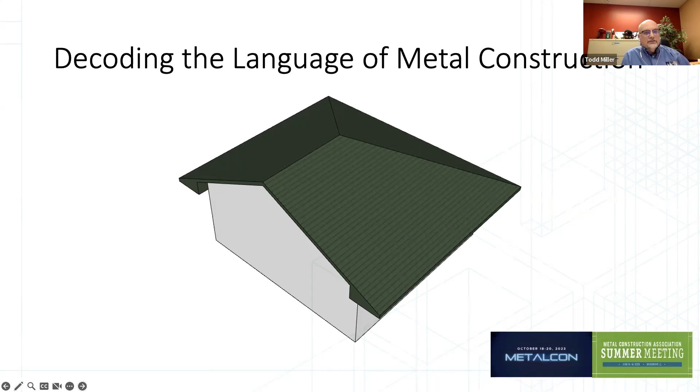So let's start off by looking at a general roof. We're going to look at some of the terms on a roof, and even though we're talking in terms of metal roofing, a lot of them also apply to metal wall panels, or at least very similar terms. So as we go around the roof, we can start with some basic roofing terminology.

Here you see some of the basic parts of a roof being pointed out. Some on top of the roof, such as the hip, your rake trim, your eave trim, your ridge trim. But then you also have areas underneath, the soffit and the overhangs. Also your open gables, which will have overhangs and soffits as well.

We got something pointed out there called a cornice, and I hear those called about 10,000 different things, and wraparounds and Victorian this and that. So there's all kinds of terms used for some of those decorative type areas that might be on a roof.

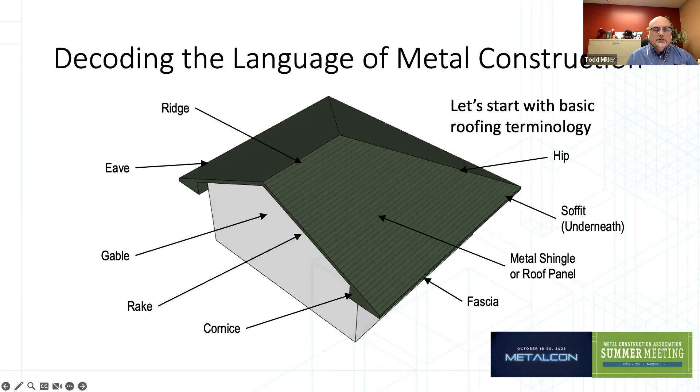But then, of course, in the field panel, at least in the metal industry, we either have some sort of metal vertical panel or a metal shingle panel that would be used in the field areas of the roof.

Looking a little further at the roof, on a hip and valley roof, we're pointing out here where the hips, valleys, and ridges are.

One thing I wanted to point out is that sometimes folks will look at a roof in a northern climate, or see a photo, and ask what are those little pointy things at the bottom of the roof that are sticking up. Well, those are snow guards, and there also can be snow rails and different ways of doing that. But basically, those are all systems of snow management.

One thing metal roofs are fairly well known for is shedding snow loads. A lot of times what happens is you get a snow load on the roof, the sun comes out, a little bit of radiant heat passes through the snow load, hits the metal, warms it up, and as it starts to reflect back out, the snow load releases and tends to slide all at once.

A little bit like some of us up north may have seen happen when our engine heats up the hood on our car, and all of a sudden that snow lets loose. But that's only if you're bad like me and drive around with tons of snow on your car, which isn't the smartest idea. But anyway.

So we use these snow guards, and they typically will be staggered over areas of the perimeter of the roof that you want to protect. You're going to want to protect doorways to keep from blocking them. You may also want to protect delicate shrubbery or statuary that may be in the firing range of that snow sliding off the roof. So that's what snow guards are.

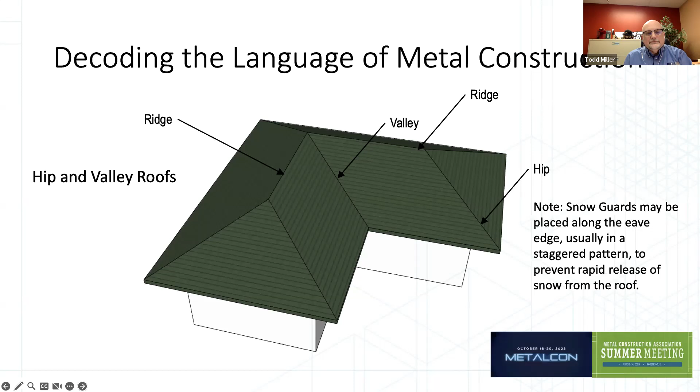So let's dig a little deeper here. We're going to look at the different types of metal roof panels. Again, some of these very similar terms would apply to wall panels as well.

So we're going to start by talking about snap lock standing seam. These are panels typically from 12 to 18 inches wide, with a raised rib or raised seam, a standing seam, in between the panels.

When they're installed, the female lock on one side of the panel snaps over the male lock of the adjoining panel. The panels may be secured either with hidden clips that attach to that male lock and are fastened to the roof deck, or some versions of snap lock standing seams have a hidden fastening flange as well, with slotted holes that screws go through. We oftentimes call those nail hems, but we don't really use nails through them, we use screws. Typical minimum pitch for a snap lock standing seam is 2:12.

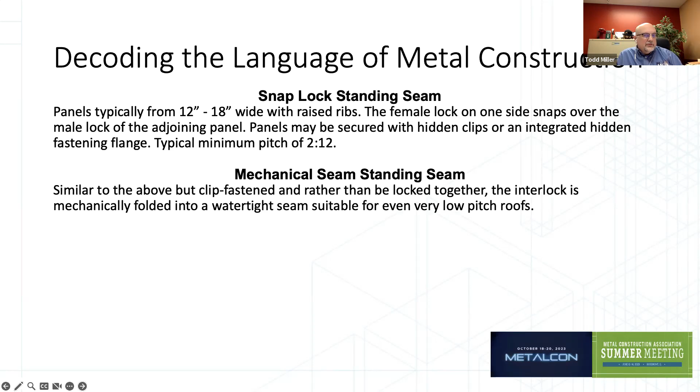Then we have mechanical seam standing seam, very similar to the snap lock, except the panels are put on the roof and rather than being snapped together, you run a seaming machine, or old school guys do it with tongs, to mechanically fold that interlock into a watertight seam. One benefit of that type of seam is it can be watertight down to a very low pitch, even as low as 1/4:12. These panels tend to vary a bit in width, typically on the wider end, maybe in the 16 to 20 inch range. All the fasteners are concealed. A mechanical seam standing seam has clip fasteners rather than the fastening flange I spoke of earlier with the snap lock variant.

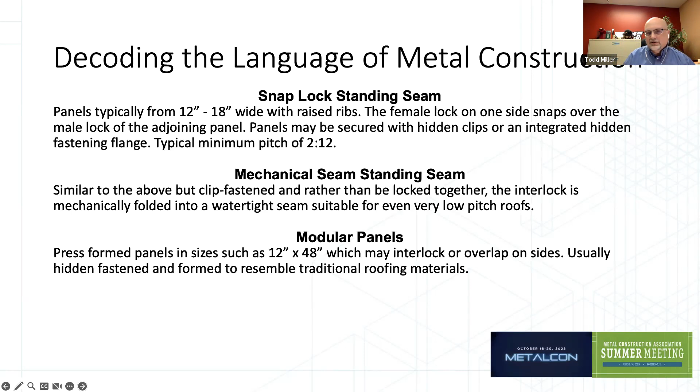We also have modular panels available in the metal roof industry, and these are press formed panels. There are a lot of different producers, and they all have different designs and dimensions. A common dimension would be something in the 12-inch by 48-inch range—12 inches top to bottom, 48 side to side. The panels either interlock or overlap on their sides. Some interlock on all sides, some overlap on all sides, and some overlap on two sides and interlock on the other two. So there are a lot of variants out there. Usually with modular panels, they have hidden fasteners, not always, but usually. A lot of times these panels are press formed to look like more traditional roofing materials—stamped to look like slate, wood shakes, shingles, or even barrel tile.

Finally, another type of metal roof panel—and I don't have these in any particular order—is what we call exposed fastener panels, or through-fasten panels. These are basically sheets of corrugated metal in various profiles: R panel, PBR panel, 5V crimp, other ag panels, and other profiles as well. They're secured to the roof with screws driven right through the panels. Those screws have a rubber grommet or washer to keep water from infiltrating around the screw hole. So those are the four basic types of metal roof panels, and you get similar variants available on the wall side as well.

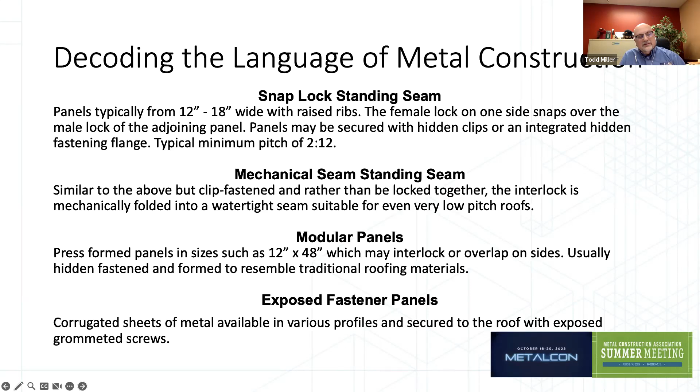A bigger term you'll hear on occasion is structural versus architectural panels. Structural panels are panels that do not require solid decking underneath of them, so they can literally span over the trusses and other structural members of the building—they can free span without solid decking underneath. Architectural panels, also sometimes called non-structural panels, on the other hand, do require some sort of solid decking underneath of them.

Just for clarification, most of the modular panels being made are architectural panels, meaning they require solid decking. Solid decking can typically be wood, such as CDX plywood or OSB, or it can also be a metal deck. Another option on older structures is a roof deck of dimensional lumber that's closely fitted—the gaps between the boards might be 1/4 inch or so, but there are no significant gaps between the boards. And then you've got battens.

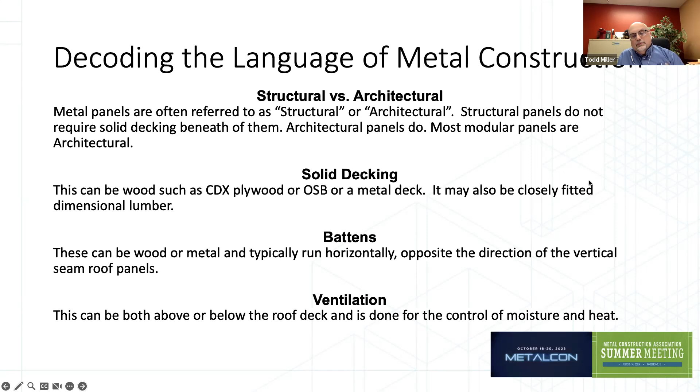Battens would be used more in the structural application I spoke of earlier. Battens can either be wood or metal—certainly on metal construction buildings, they would be metal. Those battens typically run horizontally, and then the vertical seam roof panels are installed spanning on top of them vertically up the roof, but the battens themselves run horizontal.

Another variant is to cross batten, where you run vertical battens and then horizontal battens. The purpose is to give you nice air chambers up the roof for ventilation beneath the metal panels. When you put those vertical battens down first, it creates vertically oriented air cavities so you can bring fresh air in at the bottom, exhaust it out at the top, and get good ventilation.

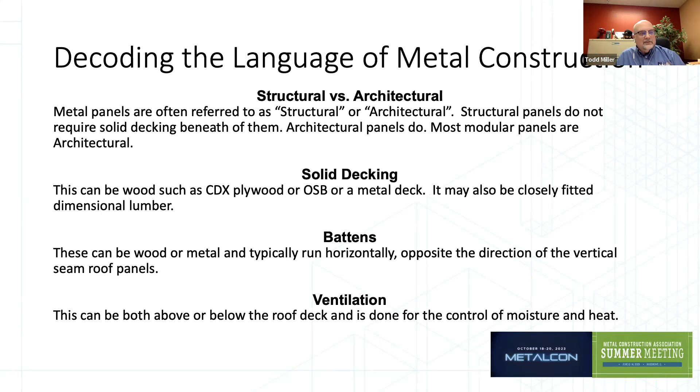So ventilation can be done above the deck, which we call above sheathing ventilation, or ASV, or it can be more typical of what we see, which is ventilation in the actual attic space beneath the roof deck.

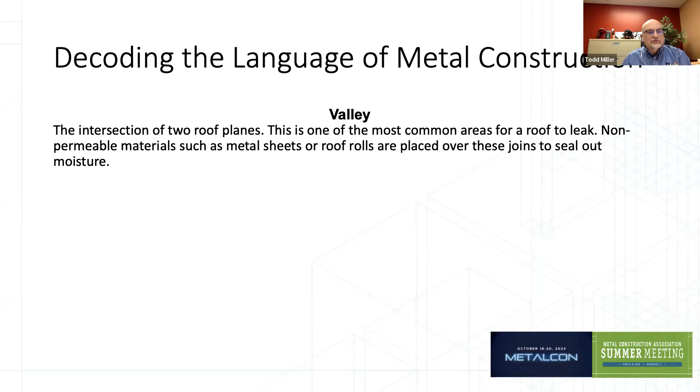A few other terms: valleys on a roof. The valley is the intersection of two roof planes, which we saw on that L-shaped building roof drawing earlier. Valleys can be a common area for roof leaks to occur, so typically on a metal roof, they line that valley with some sort of matching metal that matches the rest of the roof. There are also a couple of variants of valleys: open valleys and closed valleys.

Open valleys typically will have a valley pan put down and then a cleat on both sides of the center of the valley, and the panels come into that cleat and lock over it. We call this open because everything's out in the open, nothing is concealed. On the other hand, a closed valley is more like two J channels back to back in the valley that the panels are received into, or something like that. Closed valleys create a bit of closure to help protect against weather.

But the problem is closed valleys can also be prone to clogging with debris on the roof, because everything that ends up on a roof, if there's a valley, is going to end up in that valley at some time, just because gravity carries it there. So if you've got a valley system with closed channels, like J channel type areas, those areas might collect debris, which could be tree leaves, pine needles, ice, or snow.

And then finally, we also have Death Valley. Oh wait, that's a really hot, dry place in Central California. That has nothing to do with roofing, although we do have dead valleys.

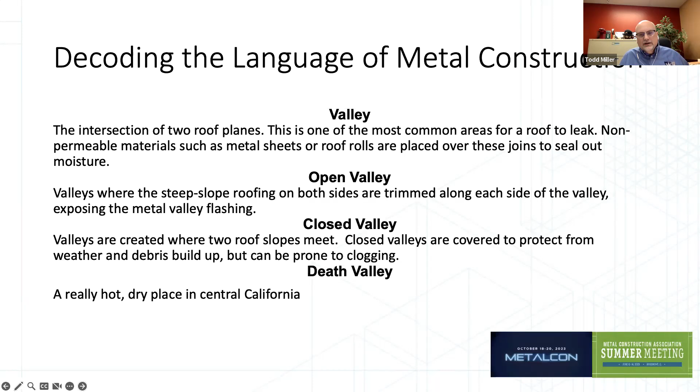Dead valleys are eave to eave situations, which can be nasty critters to work with. But again, typically you're going to line a dead valley with metal to match the rest of the roof. Ideally, you'd probably put some sort of a saddle or cricket in the middle of that dead valley to help push the water one way or the other, or perhaps both ways. And there's our Death Valley sign.

So let's look at some other terms. Flashing. Flashings are really kind of a generic term used to refer to the pieces of metal used to keep water from going into a joint. So let's say you've got a roof that abuts against a wall, or runs into a chimney, or runs into a skylight. Those are areas where you're going to flash.

One of the interesting things about metal roofing: a lot of times when you look at traditional shingle roofs, you'll see flashing on walls called step flashing. These are small 8x8 pieces of flashing that are stepped down that protrusion, whatever it is. Typically in metal roofing, we actually use lineal pieces, so those would be flashed with a continuous lineal piece rather than those small step flashings.

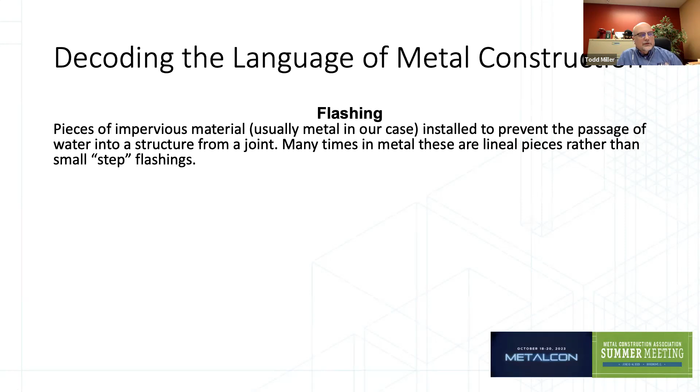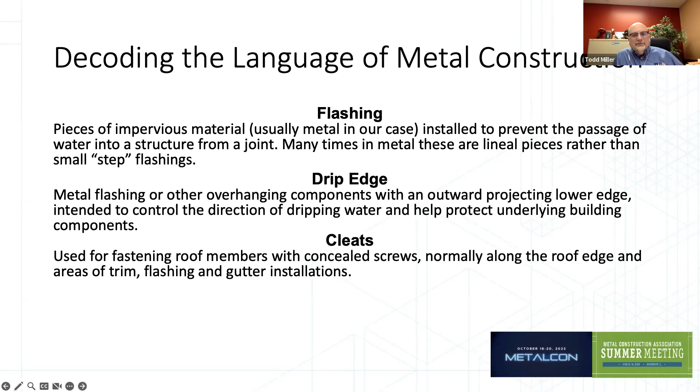Drip edge is going to be at the bottom edge of the roof, and that's basically to direct the water, as it exits the roof, someplace hopefully away from the building. If there are gutters on the roof or some other kind of water control, the drip edge is going to direct that water into the gutters. Cleats, we'll look at a picture of those in a second, but cleats are basically a method of being able to put trims on a roof without having any exposed fasteners.

Finally, I want to talk about underlayment. Underlayment typically would be used on a roof that's being installed over solid decking, and the underlayment is a water resistant or waterproof barrier installed directly over the deck. It goes underneath the roofing materials and provides an added layer of protection in the event of severe weather. But sometimes metal roof installs take a little bit of time, so you want to make sure that roof's protected by a good underlayment.

During the process of installing the metal panels as well, a lot of the trend in metal roofing in recent years has been toward what we call synthetic or polymer-based underlayments. These are still mechanically fastened, so you nail through them, typically using plastic cap or roofing nails. But they are not the old asphaltic felt underlayments, so they ain't your grandfather's underlayment, I guess you'd say.

But then we also often, as required by code, use ice and water shield around the perimeter of the roof, maybe up the valleys, maybe even up the gables. One of the very important things with ice and water shield beneath metal roofs is to use a smooth surface or a rubberized surface ice and water shield, not a granulated or sanded surface underlayment.

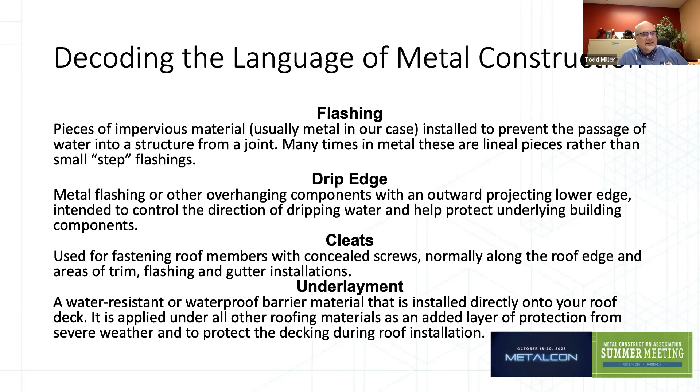The problem with the granulated and sanded surfaces is, as the metal panels sit there and expand and contract with some thermal movement against that abrasive surface, it's going to scratch the backside of the metal roof, which could cause problems down the road. So you want to make sure your underlayments always have a smooth surface. Another reason is you want to make sure your metal panels don't end up sticking to the underlayment, because with expansion and contraction it could tear it or cause it to bunch up.

So here's that cleat deal I was talking about. Nice drawing here Bob made with an eave detail where they've got a cleat. So you see that lower piece there that the screw goes through, where it's being driven into the fascia - that is the cleat. And then the drip edge is snapping over the cleat on the bottom edge.

The drip edge is going to be screwed into the roof deck in a concealed area. But what this does is it allows you to have a nice drip edge with absolutely no exposed fasteners. On the other hand, that drip edge is held firmly in place, which helps a great deal with wind uplift, making sure the drip edge doesn't blow up on you and cause problems of wind infiltration as well.

Hey, thank you, Todd. If you just back up one slide, I did want to point out one thing.

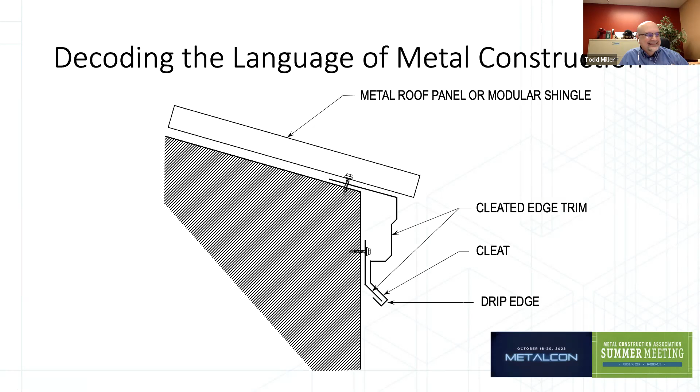Cleats are important, as Todd said, not just to conceal fasteners, but they also provide a means to address linear expansion and contraction without creating that binding situation at the fastener. I also wanted to mention, and this is my fault, I'll own it and fix that, but I've got arrows swapped. So the cleat label is actually pointing to the cleated edge trim, and the second leader for the cleat edge trim is actually pointed to the cleat. I'll fix that little hiccup in the slides here. So thank you for that.

And yeah, I was going to get into the underlying materials and talk a little bit about paints and finishes. This stuff has been - it's old terminology in this industry. We've used it forever, but it's funny that as we've gone along, some of these definitions may not be exactly what you think.

And Gauge is a good example of this. I've very carefully worded this definition: a numeric identifier for steel less than 3/16 of an inch thick, and that's actually called out in a couple of different standards. At 3/16 inch or above, you use the thickness expressed in fractional inches, but below 3/16 inch thick, you use this gauge identifier. A smaller gauge number means a thicker steel, and I've got some examples on the next slide. Also, a gauge represents the thickness of the uncoated steel - the metallic and paint coatings add to this.

Now, what is not called out here is that there is actually not a consensus-based written standard that says 26 gauge is equal to X millimeters or fractional mils or fractional inches. That does not exist. A big reason why is that although 26 gauge from different manufacturers are very, very close in decimal thickness generally speaking, they won't match exactly. Really the reason why is that when this terminology was evolving, there were really two main steel manufacturers in the United States, US Steel and Bethlehem.

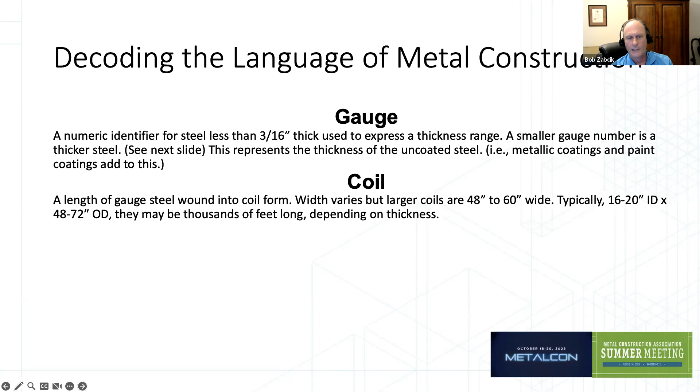But coil, well, that seems pretty obvious what a coil is, right? There's some interesting tweaks to this too. A length of gauge steel wound into coil form. The width varies, but coils are usually 48 to 60 inches wide. Larger coils can be slit down to smaller coils to manufacture different types of products from there. But we're talking about the base coils.

Usually an interior diameter of 16 to 20 inches, an outer diameter of 48 to 72. If you do the math on that, we're talking about materials that are 0.025 to 0.03 inches thick. That's a whole lot of material. They can be thousands of feet long rolled up.

And then there's flat stock. Also sounds obvious, but maybe there are some interesting things you aren't aware of. Most flat metal panels come from flat stock, but flat stock comes from coil. And when you wind coil, those dimensions you see up there, the interior diameter and outer diameter, are carefully chosen on the basis of the thickness of material, so that the interior winds of that coil don't actually reach the elastic limit, and there shouldn't be any memory.

In other words, the coil trying to take back its round form. But of course, if it sits in a banded coil position long enough, it will have some memory to it. So you actually have to decoil or flatten material for flat stock. We do that in an inline process in this industry quite often.

But that's really the difference between gauge, or how these three interrelate: gauge material, coil, and flat stock. We'll ship flat stock to make special pieces in the field, or we will make unique boxes, trim boxes, cornices, like we saw earlier, out of those materials instead of from coil. Coil generally is used to produce panels or some type of blank for another piece of material being made from it. So some of that terminology does cross over. That's why I wanted to bring that out.

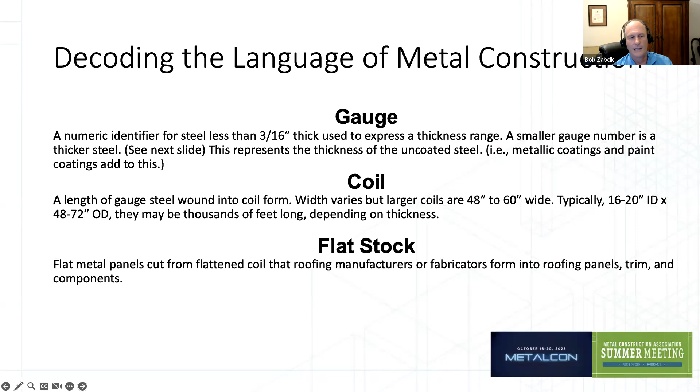So, next slide. Here's an example of what these material thicknesses by gauge look like. This is not, again, a consensus-based standard. This is just, if you run through the ASTM calculations and consider the thicknesses of the various coil coatings, this is what you're going to see. The base material thicknesses are generally speaking the same, and that's what the dark numbers are. But then when I add the different coatings and materials to them, I get different thicknesses on the basis of what that coating is. This just shows you how that varies versus the most common gauges we see in this industry, which are 22, 24, 26, and 29 gauge.

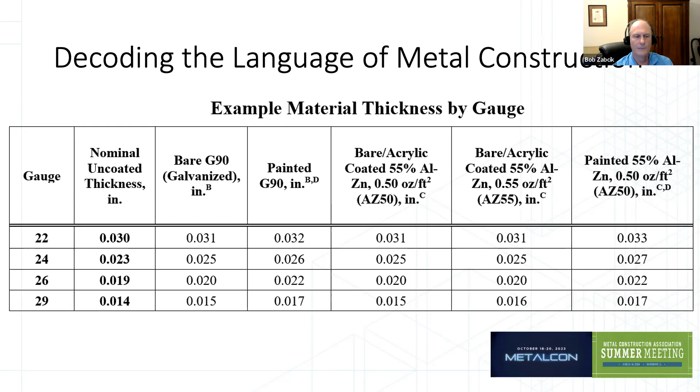So again, these are decimal inches here. You could convert those to millimeters if you want. And those coils, perfect timing, Todd, those coils are generally speaking either bare, galvanized, or galvalume, or they're painted, which leads us to our next term, Kynar.

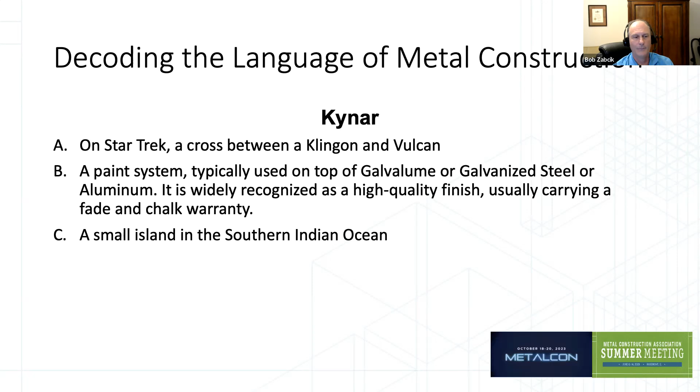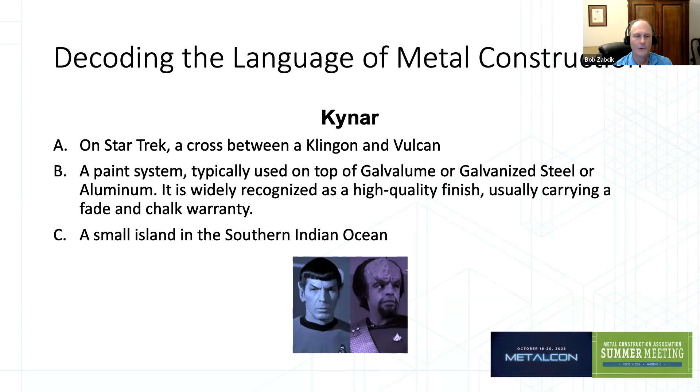So a little multiple choice for you. Is Kynar on Star Trek a cross between a Klingon and a Vulcan? Is it a paint system typically used on top of galvalume or galvanized steel or aluminum, widely recognized as a high quality finish, usually carrying a chalk and fade warranty? Or is it a small island in the southern Indian Ocean? If you can't get this one, I can't help you. The answer here is obviously B. But just for grins, I wanted to put that out there, because when I see the word Kynar, that's what two things popped into my mind: a Klingon and a Vulcan. It kind of fits together. So there you go. Gotta love Spock. He's one of my favorite characters on any television show or movie ever. All right, next slide, please.

So I've talked a lot about galvanizing and galvalume a little bit. Let's just talk a little bit about metals in general.

We've all probably heard the term similar or dissimilar metals. I haven't put those on the slide because hopefully you remember from high school chemistry what those are, but really what it comes down to is dissimilar metals, or metals which, when put together in the presence of an electrolyte, which is a liquid media able to transmit electrons, generate some type of corrosion. Similar metals, when I put them together in an electrolyte, there might be some corrosion, but the two metals don't assist each other in their respective corrosive processes. That's really one of the key things we're accomplishing with galvanizing.

So typically, as I said, it's a process where metals, typically steel and iron, are coated with a layer of zinc to reduce or eliminate the potential for rust. Maybe most people know this, but in case you don't, zinc is a sacrificial coating, meaning the zinc corrodes instead of the iron. This is what makes it very widely used for exterior applications, like sheet metal for panels and roofs.

Now, we generally don't use bare galvanized in most commercial products. Ag products, we do use a lot of bare galvanized. There are actually times, certain corrosive environments, where bare galvanizing actually works better, but those are pretty unique and rare. Generally speaking, when we have plain zinc galvanized material, we're coating it with a Kynar or some other type of paint system.

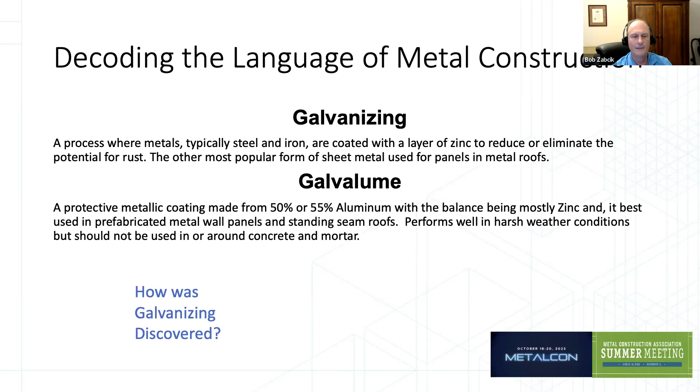There's a very interesting story here. I'm going to get a little off topic, but I think you'll find this interesting. As far as I can tell, it's true. I've done a lot of research. I think this is commonly accepted. This gentleman, his name is Luigi Galvani, excuse me. He was an Italian chemist in the late 18th century, about 1780.

You know how, Todd, in these days, if we have a sick loved one, what do we do for them? Chicken noodle soup. We make them chicken soup, right? Well, I guess if you're a chemist in Italy in 1780, you don't make chicken soup, you make frog soup. I've had turtle soup, I've never had frog soup. And honestly, I'm not going to rush out and try it.

But supposedly it has great healing powers, or at least was thought to at the time. So being the doting husband that he was, Mr. Galvani runs out and grabs some live frogs from a local market, brings them to his house, and harvests the legs off the frogs. He skins them and puts a little salt on them, probably not to season them, but to dehydrate them. Then he hangs them up, and this is where it's pertinent, on a copper wire against his window. That window was open, but it had iron bars on it.

Well, copper and iron are dissimilar metals. And of course, there's salt and moisture on the frog legs, so we have an electrolyte. So lo and behold, the wind starts to blow, and the frog legs touch the iron. They're already in conduction with the copper wire, and they begin to twitch. And of course, we know now that the electrical impulses were because the frogs had recently enough been alive that their nerve cells still worked, and those electrical pulses were exciting the motor nerves and causing the frog legs to twitch.

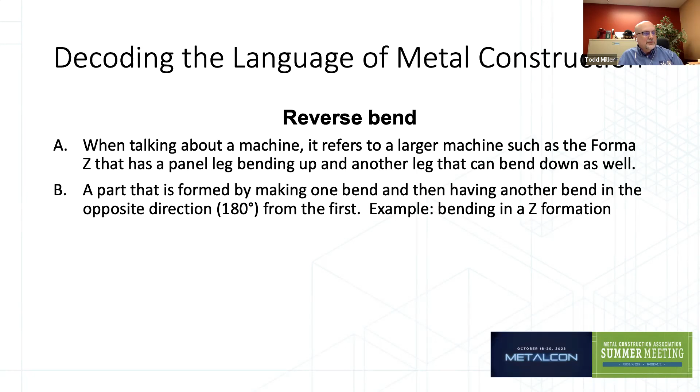Well, the correct answer actually is D, so it could be both A and B as a reverse bend. It's a particular type of machine, but it also refers to a particular product profile or trim profile as well.

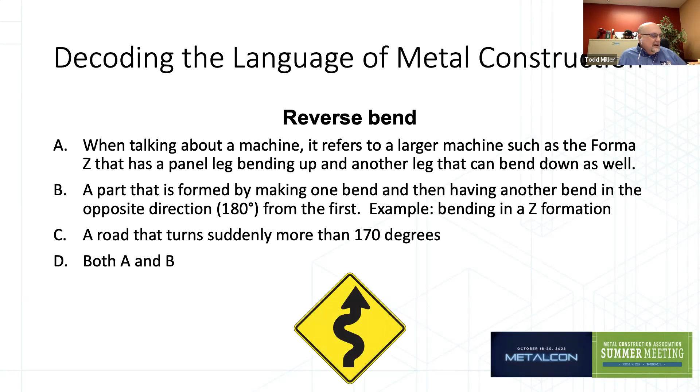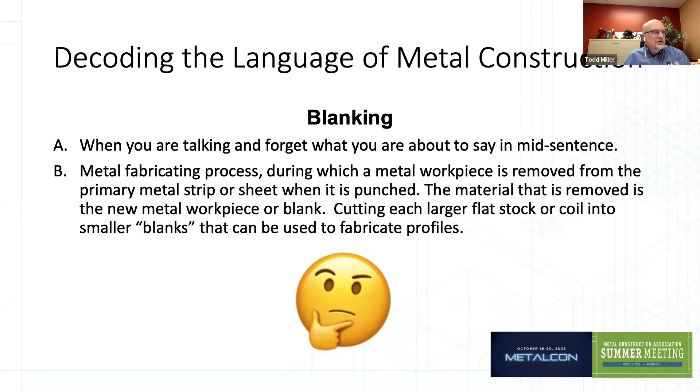So let's look at methods of metal forming. We want to look at three primary types of ways in which metal is formed. One is roll forming. Think of that guy that brings a seamless gutter machine to your house and it just rolls gutter out of a flat or continuous coil of metal—that's what roll forming is. Roll forming creates consistent long parts of whatever length you want. Oftentimes the machines are programmable, so roll forming would be the method used for standing seam panels as well as some trims. The big thing on roll forming though is everything is lineal—it's one direction, one straight consistent part.

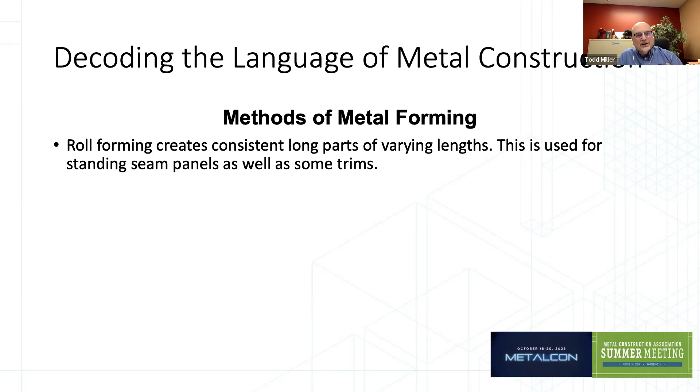Then you also have another method of forming metal, which consists of press brakes, folders, or hand brakes. These are used to create specific length trims by putting a blank into it and then bending it as you need it to be. Compared to roll forming, a press brake or a folder can be programmed, or a hand brake can be manually operated to create pitch-specific parts or even tapered parts. So with a roll former, everything is just one dimension, continuous long parts. The variety we get with a press brake or forming parts this way is the ability to do more customized parts that may be specific to the pitch of the roof, and again, maybe tapered parts. So you may have valley pans that are tapered so that one can nest into the other when you're lapping valley pans up the length of a valley.

The last method of metal forming common in our industry is stamping. These are large, high tonnage stamping presses used for producing various modular panels, as we call them—the various metal shingles, slates, and tiles we talked about earlier. There's tooling put inside the presses that create those parts. The tooling may be transfer tooling, where the parts have to be mechanically moved from one die to the next between hits, or tooling can be progressive, where the part stays connected as it goes through the various stations of the die until the final finished product gets cut off at the end and thrown out of the machine at some ridiculously high rate of speed. Well, it does happen sometimes, so you've got a catcher on the end to catch those parts.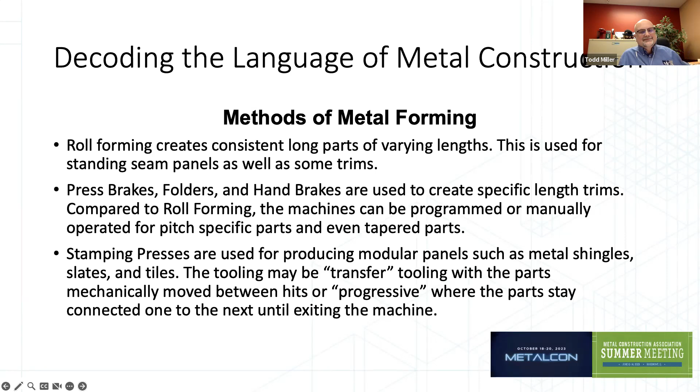Some other terms in terms of metal construction: riveting. Here we've got another multiple choice. Riveting can be A, placing a short metal pin or bolt for holding together two plates of metal, the headless end being beaten out or pressed down once it's in place.

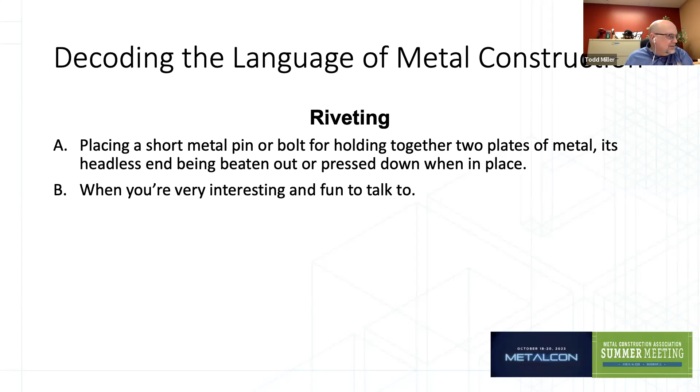Or is riveting B, when you're very interesting and fun to talk to, like Bob? It could be that too, thank you for that line. I will say that it could be A or B in this case.

But I guess as it pertains to metal and construction, it's probably A. So now we're going to turn over to alphabet soup and send it back to Bob to have acronym time.

I'll tell you, those folks who did that riveting in those scenarios - I think we've all seen pictures of the Empire State Building being erected, other tall steel buildings in the early 30s. Those people were seriously hard workers and took a lot of dangerous chances in their jobs, and it's pretty amazing to watch if you get a chance to see some of those few films made of that process.

So I mentioned this earlier, and this is a big part of the impetus of this program in general. If you've been to an MCA meeting, you've heard me talk, and you've probably heard a gentleman I work very closely with named Andy Williams, who's also our lead technical folks at MCA. We have council meetings and tech meetings - our council meetings are about 45 minutes, our tech meetings are usually about an hour and a half. We have a lot of research programs doing a lot of different things, and we're flying through these presentations. So I've been told many times, look, that's great, we appreciate what you're doing, but can you give us a cheat sheet on the acronyms that you're using?

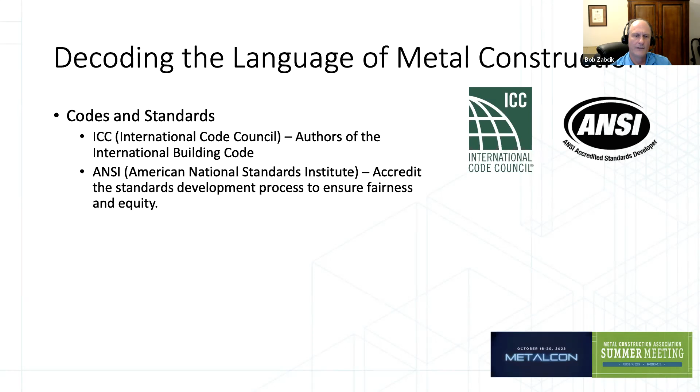So this whole consensus-based process for building codes - the requirements for this process are set by ANSI, the American National Standards Institute. They accredit the standards development groups like ICC or some of the others we'll be talking about. Their key focus is to ensure that fairness and equity has been used in developing the standard, because it could become law. And that's very important in a democratic society.

We should not be able to pass laws that require certain things be done, and you have to go to a certain commercial entity to get them, right? That's not really part of the spirit.

So one of the main ANSI-accredited standards developers that we work with at MCA is the American Iron and Steel Institute. They produce a document called AISI S100, amongst many, many others, that dictate the structural design of cold-formed steel members made out of coil stock gauge material, just like with timber. In fact, this 3/16-inch dividing line actually originates in the AISC spec, but that's the dividing thickness between these two codes, generally speaking.

So we've worked very closely with AISI and others, and they have user categories. They also have to announce certain types of development and committees that they're having, so that the public is aware that this is going on.

So just like AISI does for steel, the Aluminum Association does similar for aluminum. We haven't talked so much about aluminum, but we make a lot of aluminum products. We make a lot of roofing material out of aluminum products - a lot of Metal Construction Association members do that.

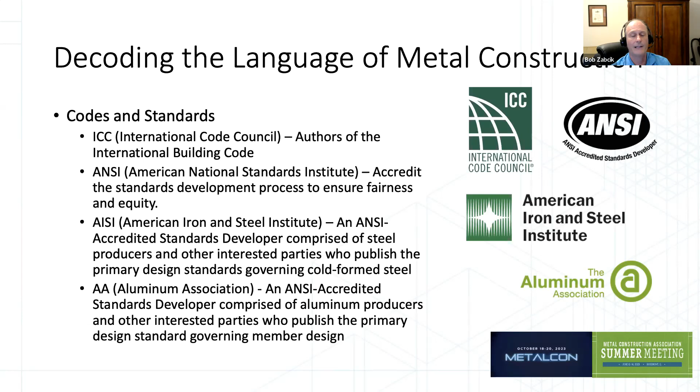And the Aluminum Association essentially provides a similar service to their industry by developing ANSI-based accredited standards dictating aluminum design. So there's their logos on the right-hand side.

Next slide, please. We're going to continue down this code and standards path a little bit. The National Fire Protection Association, or NFPA, is another one we monitor and work with very closely through other groups as well.

They're a developer of codes and standards revolving around fire protection. They do a lot more than just that—they also have a model national code, and they do all kinds of standards for fire protection, firefighter equipment, and firefighter tools. None of that really affects the building industry, although it's interesting that the 75-foot limit you see a lot, and certain fire limitations for roof height on certain types of fire protection, comes from the length of a ladder, for instance, of a typical ladder. So those are interrelated, and that's why NFPA sets a lot of those standards that do very closely affect our product, particularly if it's insulated with some type of combustible material.

ASTM—probably everybody's heard of this, American Society for Testing and Materials. Massive organization, develops a gigantic library of standards. I'm not going to even begin to tell you how many there are. They're easily in the thousands. They do standard specifications, guides, all kinds of things.

And pretty much any material that we've talked about, be it steel, is covered by an ASTM A-series spec. So they have A series, B series, C series—generally speaking, the material series. D and E cover different types of test processes and standards.

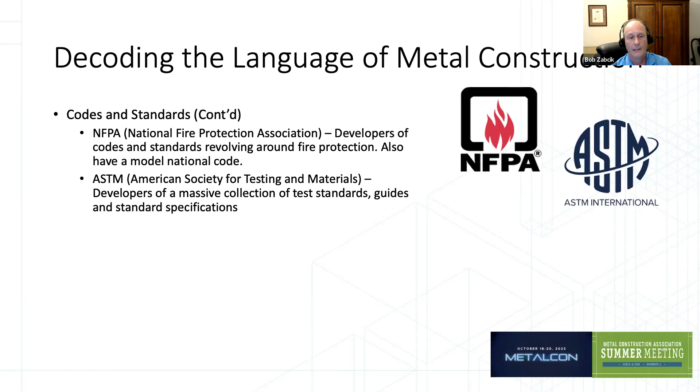But if you were to go through IBC and count, ASTM is cited more than any other organization, hundreds of times for various things that they do. So it's a very influential, important group, and I encourage a lot of people to join ASTM. It's a really interesting thing to do—a fun process to participate in, can be challenging, but it's your chance to guide the industry from your own perspective.

ASHRAE is very similar. Maybe it doesn't affect metal construction exactly, but remember, we have members who make insulated metal panels and different types of insulated products. Even some members that don't make IMPs might sell insulation, so they do concern themselves with this. The American Society of Heating, Refrigeration, Air Conditioning Engineers—again, I'm only going to talk about what they do that affects us.

They do a lot more than just make 90.1, but 90.1 is the standard governing minimum energy efficiency for commercial and multifamily residential buildings. It sets U factors for wall assemblies and equivalent R values. It sets air infiltration standards. It references this next group, Cool Roof Rating Council, or CRRC, for cool roofing provisions.

CRRC are developers of CRRC 100, the standard governing cool roofing and related measurements and ratings of aged properties. I'm actually on the CRRC technical committee, and we work with that standard virtually every time we meet. It is beginning to be adopted and looked at very closely all throughout the United States now as people begin to concern themselves with heat island effect and how it relates to climate change.

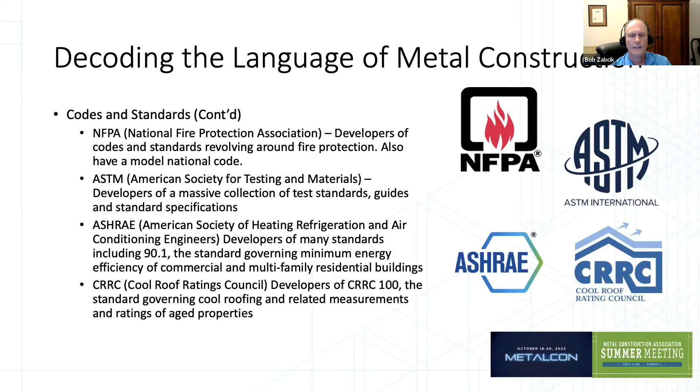So let's move a little bit—we're getting into groups now that do certifications and listings, but they probably also do standards. UL is a good example of this, so throw them in the bucket with the standards developers I just covered.

But let's talk about certifications and listings in general first, as they're really two different things. A certification is a statement from a third party—in this context, a third party who says that you have passed this test, or you meet this standard, or your spec or product meets this specification, and it certifies that.

A listing is a certification plus some other stuff. Specifically, a listing means your certifications are listed on a publicly accessible, third-party hosted source, and those certifications also relate to a QC program—an annual inspection QC program—which verifies that the product being certified is being made at these particular plants in conformance with that same standard. And there's a third-party auditor who chases that down and makes sure that's all done.

Why is that important? Well, not just public safety—obviously that's the most important thing—it also has a lot to do with insurability.

If you want a building to be insurable, you generally need to address a lot of UL standards. In fact, many of them are part of building code requirements. Insurability is a little bit beyond what the code requires. You're probably familiar with the old saying that the code defines the least performing building you can legally have. Even UL standards are cited a lot in the building code, but many of these UL standards go above and beyond the minimum requirements of the codes, and they do that for insurability. Major insurance underwriters will look for UL listed products in buildings, and they will make sure they've been incorporated into design so they can provide greater levels of insurability.

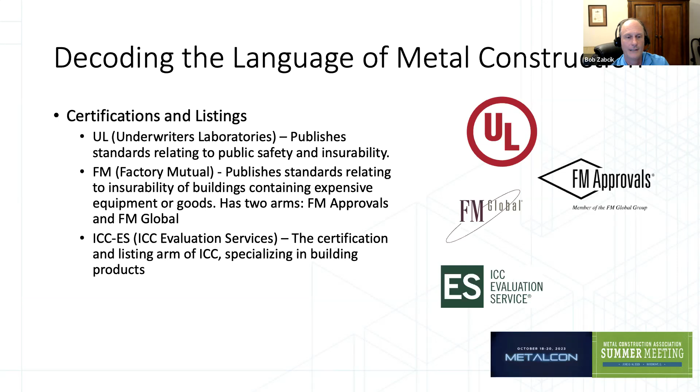A similar group is called ICC-ES, or ICC Evaluations. They are the certification and listing arm of ICC. They specialize in building products, windows, doors - you'll see some metal products, insulated metal panels. Many of them have ICC-ES listing. That's for products that are not necessarily engineered specifically to project requirements, but those products have engineering in their design. The ICC-ES standard verifies to what level, or to what standards, this product has been engineered, and then produces that in a publicly available third-party written source. So now an engineer can compare what ICC-ES has certified to the code requirements and ensure they match up. So they're very important.

And IAPMO - the reason I brought them up, they're the International Association of Plumbing and Mechanical Officials. Big deal, Bob, what does that matter? Well, they are mostly focused on MEP systems, but they are moving into building products now. So you'll begin to see some building products listed under the IAPMO label. It's beginning to be more popular from what I see. It's still not anywhere near as popular as ICC-ES, but it is beginning to catch on a little bit more. You'll see it more often, but it serves the same function as far as building products are concerned.

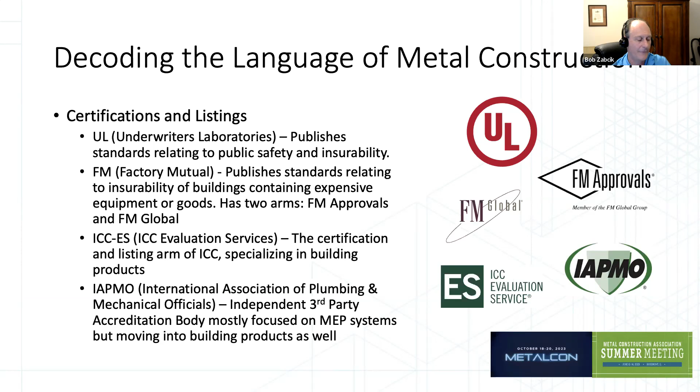Next slide, please. I'm going to wrap this up, and I think we're pretty much done. This may be the last slide.

You probably, if you've done ag buildings, you've heard of NFBA, pole barns. I won't go into what that is. It's an interesting way to build a building, and they really work very well for agricultural structures. We just don't have time to get into that, but they do publish those standards, and they've now been adopted in the building code. I'm not sure if NFBA is an ANSI accredited standard, but I believe they've used another ANSI accredited agency to canvass their standard. That's much like MCA has done with our edge metal tests. We used SPRI, the single ply roofing industry.

We use their canvassing process. So we're not an ANSI accredited standards developer, but we have an ANSI accredited standard, ANSI MCA FTS1, because we used somebody else's process. And of course, we partner with them and pay them money to host it for us. Steel Framing Industry Alliance is really focused around studs and specification of stud materials, and promoting the use of stud construction in the building space.

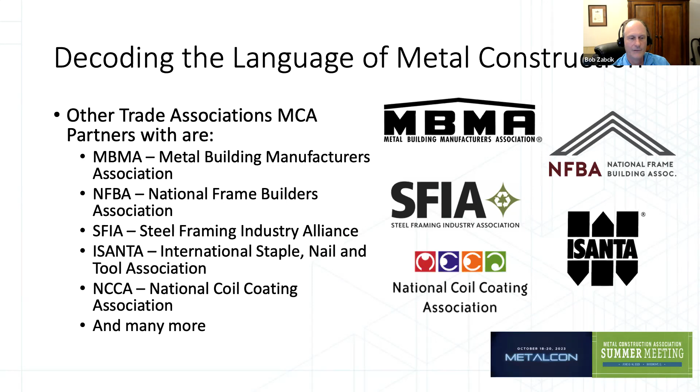And we work with many more, and some of the folks we work with are on this call today, and I may have missed mentioning them. I apologize, but we know who you are, and we appreciate all the work that you do in helping us, and we sure hope that at MCA we're helping you to that same level. So that is it, and I'm all done. I guess if we got any questions in the chat we can address those, and I'll turn it back to you.

So we currently do not have any questions in the chat. The questions that did come through were regarding a few other minor techie things, but everything was fantastic. Someone commented, 'I love this,' this is Christine, 'thanks, you guys were riveting.' There you go, yes you were. I don't know you, Christine, but I know I like you. All right.